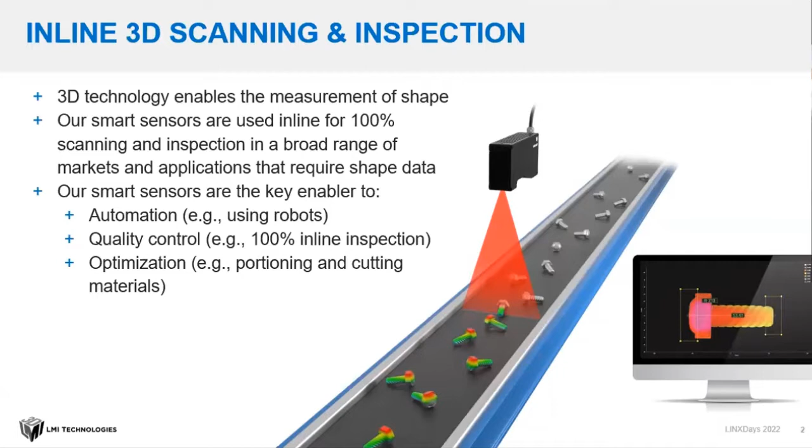LMI makes inline 3D scanning and inspection sensors. They're used in automation, quality control, and optimization applications. We have been in business for quite a long time, since roughly 40 years back; we started at the end of the 1970s. We've sold quite a large number of sensors worldwide for different applications since then. And we're still employing people. We were about 416 people.

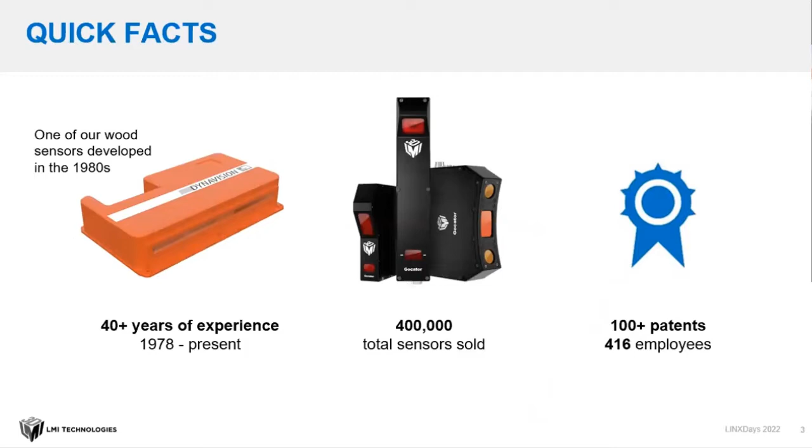So what do we do differently? Well, what we do is chip level engineering. That means that we design our sensors from the chip up. We don't buy cameras and put them into our sensors. We build cameras. We don't buy lasers or laser drivers, laser pens. We build laser pens, build them from the diode up. Everything we do is smart technology.

Smart can mean that a sensor by itself can actually solve an application and give you a yes or no, good or bad decision, or just output some measurements. It can also mean that it's a smart way to connect a couple of sensors together, making it easy for you to get a wider field of view or scan something in 360 degrees. Everything has to be simple, user experience driven. So there is a web server in all our sensors, and you can connect to it just by using your browser, and you will have your sensor at your fingertips.

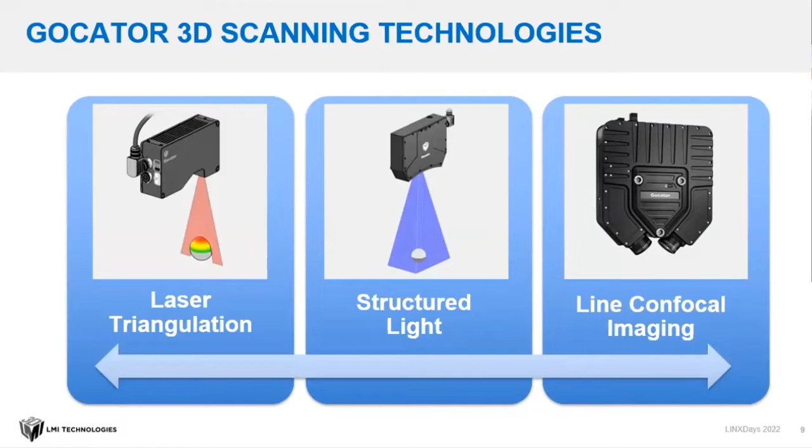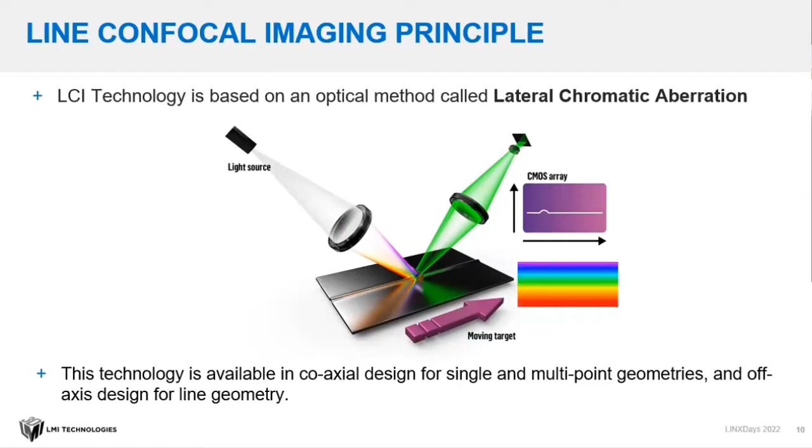This means that we have a white light source that illuminates the target. It creates a spectrum of light wavelengths, and each wavelength will be focused back on a position on a CMOS array. And this means that we use the light spectrum here to resolve a measurement range. So it works roughly like this, where you have the different distances being focused on the detector here. So when you have a nice clear surface, you have a strong peak. If the surface is opaque, it will be a lower peak.

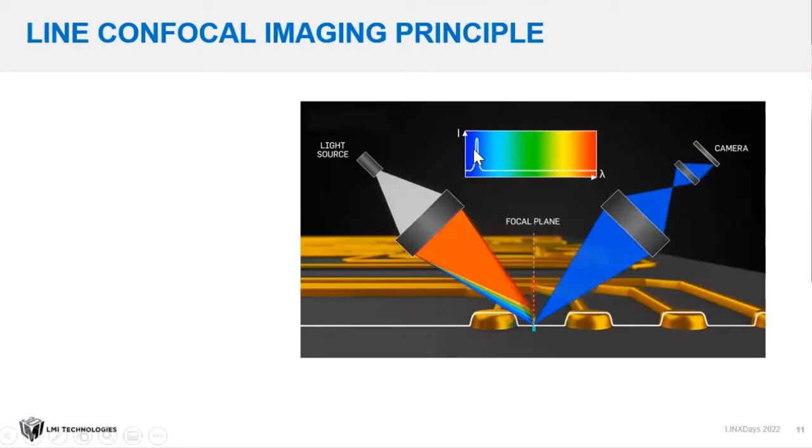So our sensor families consist of the Gocator 1300s, single point sensors. They come in a large variety of sensors from 20 millimeter range up to 2 meter range. Our workhorse is the Gocator 2100 and 2300. That's VGA resolution and megapixel resolution sensors. The higher resolution, 2000 pixel sensor along the laser line is the 2400. When you need to go even faster, but still with a high resolution, you go to the 2500 series. This is about 10 times faster than the 2400, but also with a 2000 pixel resolution along the laser line.

Now we're coming to the interesting parts, because it says 4K here. So this is the 2600, but with a 4K imager, and not really the high speed of the 2500, but it's faster than the 2400. All these are laser triangulation based sensors. We do have a Gocator 200 as well. That also is based on laser triangulation, but that's a specialized sensor for wood scanning.

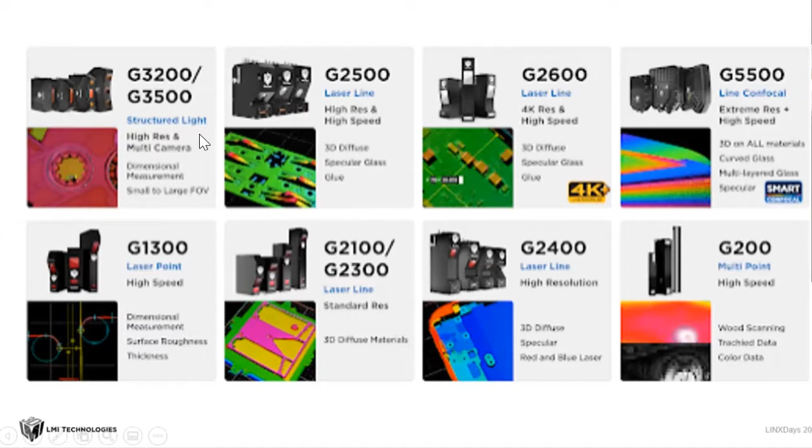And then we get into the Gocator 5500, the new addition here with the line confocal technology. So the advantages of our smart sensor technology is that we can actually scan, measure, and control in just one unit. This means that you don't need any external controllers. You set it up very easily using a laptop and you fire away. Factory calibrated, no external lighting required.

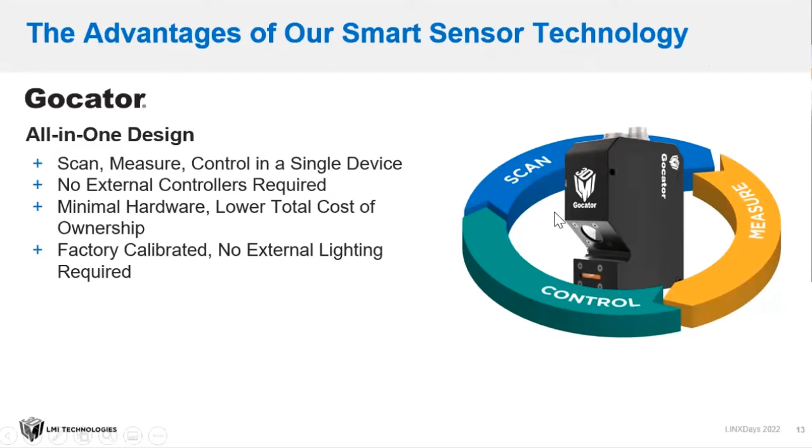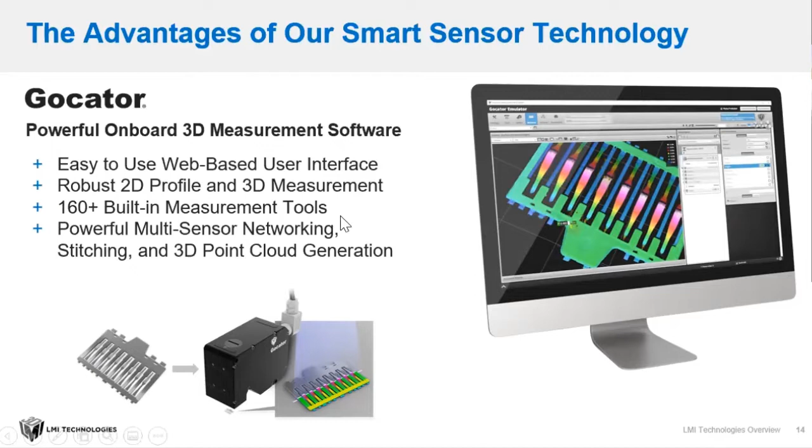We have a big suite of tools on board, so we can perform interesting measurements and calculate different intricate distances. And there are filters on board, so you can actually improve the quality of the data that you're looking at, or actually highlight the kind of data that you're looking at.

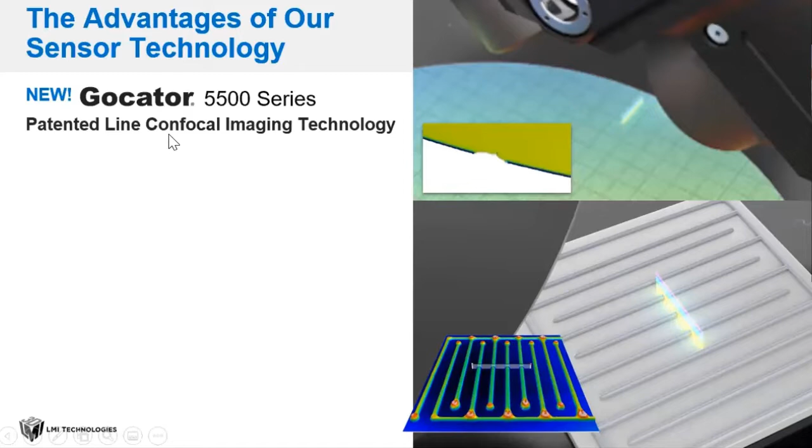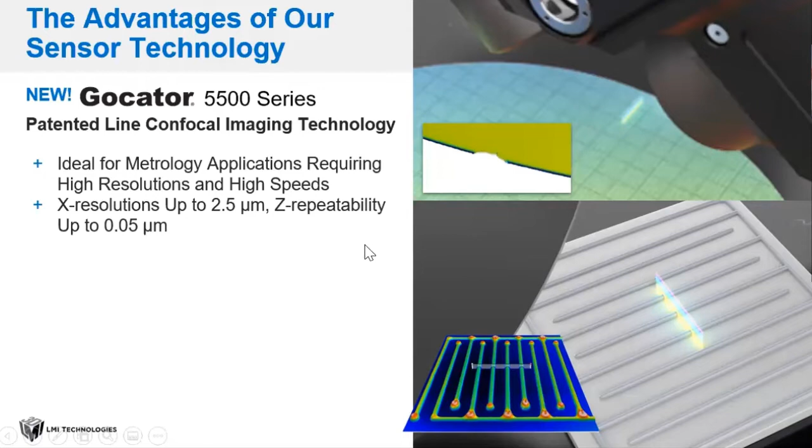The Gocator 5500 series, our patented line confocal imaging technology. This is ideal for metrology type of applications that require high resolution and high speeds. We're talking about X resolution, that's resolution along the line here, of 2.5 microns, and Z repeatability in the measurement range down to 50 nanometers. That's really good. So best in class performance on challenging material structures, multi-layered, curved, transparent, and shiny materials.

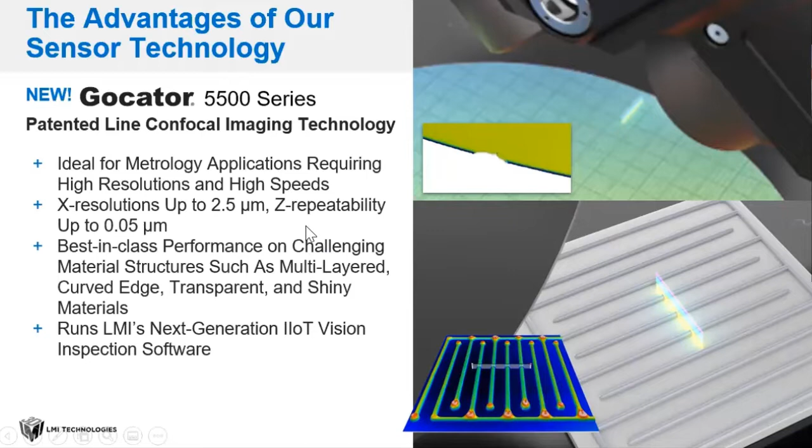And it runs our next generation vision inspection software called GoPxL. So what's unique about this here? It simultaneously generates topographic data and 2D intensity data. That's what our normal Gocators do as well. But in this case, you also get 3D tomography. That is multi-layered 3D geometry.

You capture about 1,720 data points per profile. We can scan at speeds up to 16 kilohertz. That is where you have PC acceleration available to capture objects in motion for inline inspection. Easy to mount, low sensitivity to surface orientation, and so on.

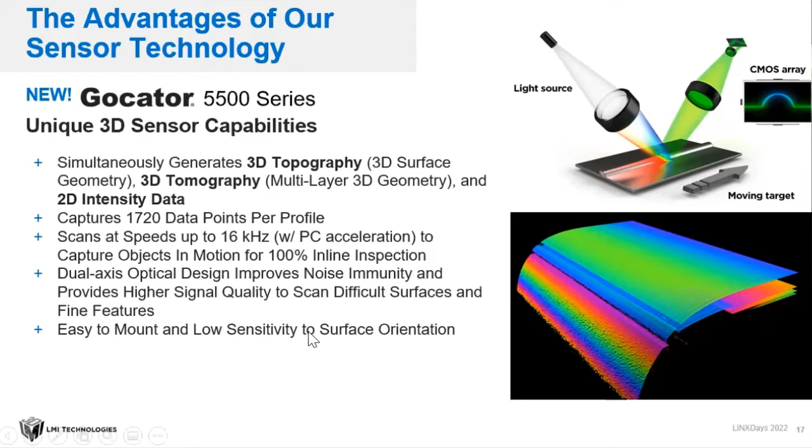It identifies defects such as delamination, scratches or dust on the surface or inside a laminated glass, for instance. It handles any surface type, mirror-like, glossy, opaque, translucent, curved, soft, fragile, or porous. And it scans materials with any color combination.

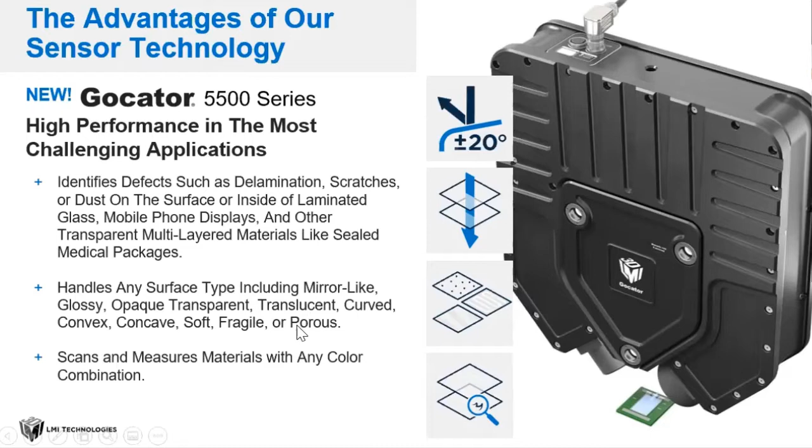So you can get 3D, 2D, and tomographic data from up to 8 stacked surfaces in one scan. That means that we can do thickness measurement through clear layers, coatings, and air gaps. We acquire a profile line of data points simultaneously at speeds similar to 2000 confocal point sensors. And that's pretty good. And then we have multi-sensor networking capability under development that will come a little bit later.

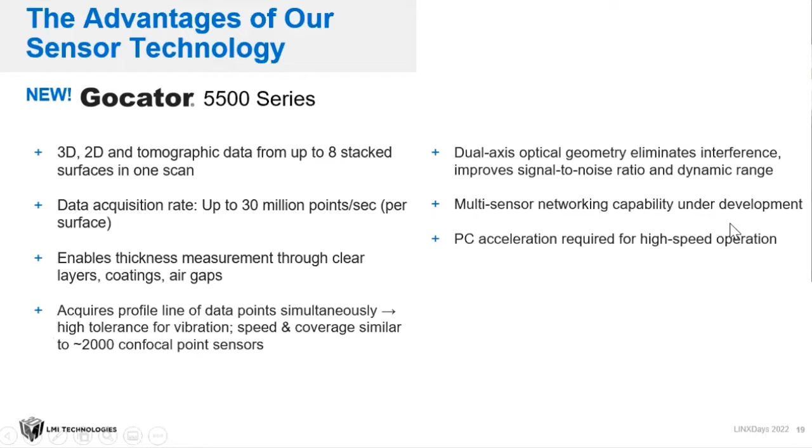And to get the high speed that can be interesting, you need PC acceleration. So the sensors are typically bigger than what you're used to with the normal Gocators. If we take a Gocator 2380, for instance, that's one of the biggest of the Gocators, or the 2490, you have a sensor that weighs about 1.5 kilos. The smallest one here, the 5504, weighs 4 kilos. The 5512 and 16, they are around 20 kilos.

Measurement range, 1.1 millimeter, 3 millimeter, 5.5 millimeter here. So it's all about small parts inspection. Field of view is also quite small, but it also means that you get really high resolution and repeatability.

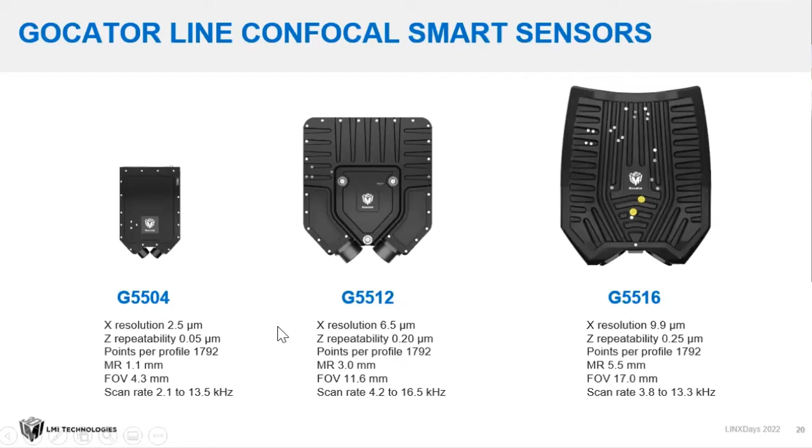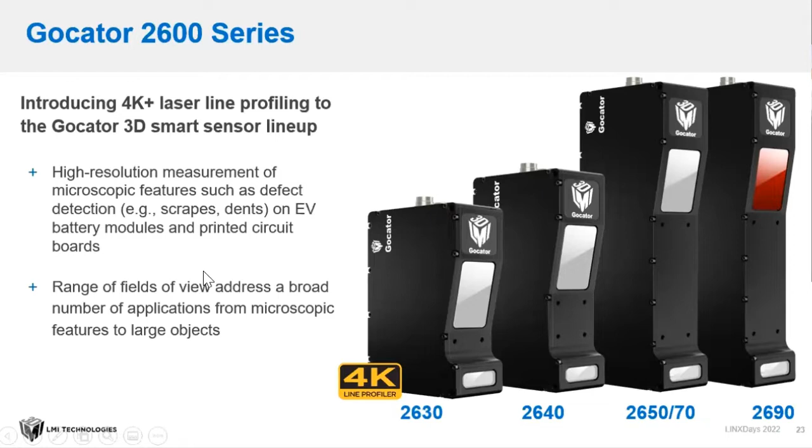Next in line, we do have the Gocator 2600 series, the 4K line profiler. So here we're introducing a complete family of sensors from the 2630, 40, 50, 70, and 90. This is something that is going to be launched within the next days from now. They are ramping up and getting ready for production here, so that you can start looking at some really interesting scanning solutions. High resolution measurement of microscopic features, defect detection on EV battery modules, printed circuit boards are typical examples of where this sensor will be used.

A 9 megapixel imager, 4,200 points per profile over the laser line. That gives you, for instance, X resolution down to 70 microns for 47 millimeter of field of view. Or if you have the biggest one with 2 meter field of view, you're down to 0.5 millimeter resolution. Full field of view, you can scan at 300 hertz. And as usual in the Gocator families, if you reduce your active area of this imager, you will increase speed.

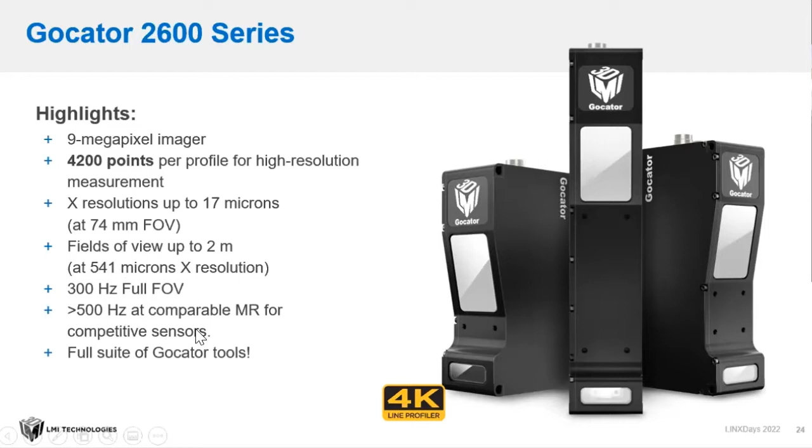So the Gocator 2600 can scan field of views up to 2 meters. And now, replacing, for instance, dual sensors where you need to have two 2400s or even more 2300 sensors to cover a certain field of view at a certain resolution, you can now look at the possibility of maybe scanning with a single sensor over a large field of view. This is really interesting.

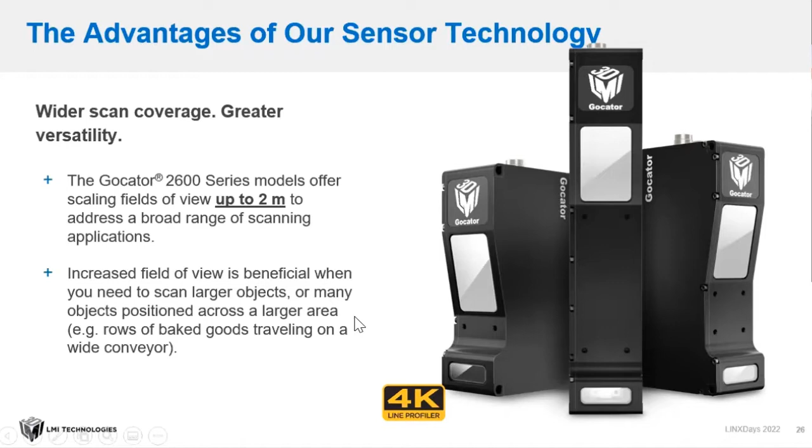And of course, we have our usual native support for multi-sensor networks. It's all there. It outputs a single high-density 3D point cloud ready for measurement if you need that, or just a laser line and a profile. And you can scan 360 of a target in multiple views, or you can mix different 2600 sensor models. That means that if you have a thin, wide material like a particle board or something, you can have different resolutions on the edges where you may want to see greater details.

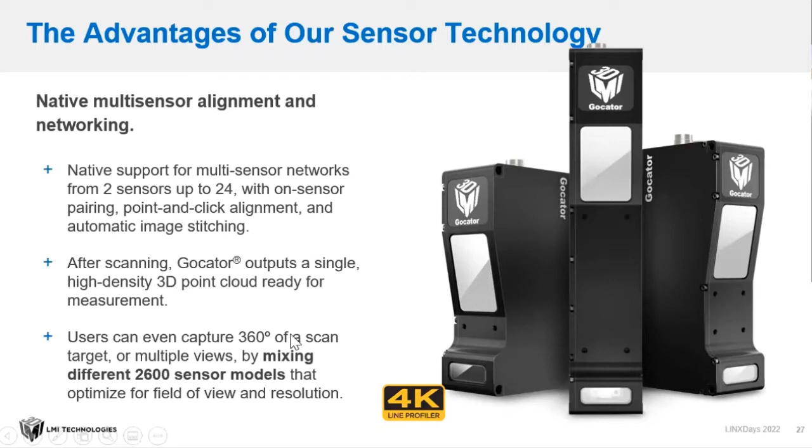They're built on LMI's leading smart sensor design architecture, so you will recognize yourself when you start up these sensors. And of course, it's our standard, easy-to-use, web-based interface. You have the I/O connectivity, everything is there.

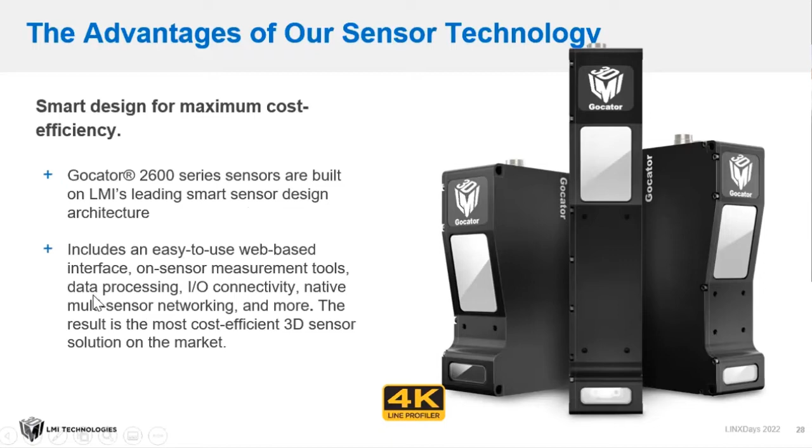Just a quick comparison here. I know that Zach will tell you a little bit more about this. Here to the right, you see a scan using a Gocator 2450. And to the left, you see a Gocator 2650 here. And as you can see, there's greater detail on the 2650 here.

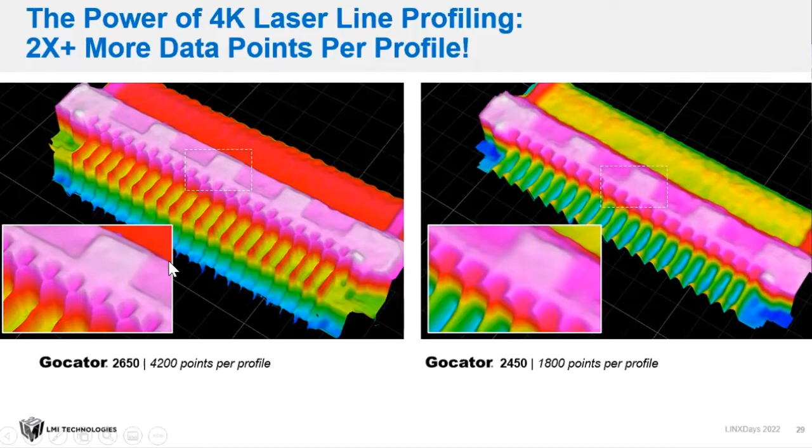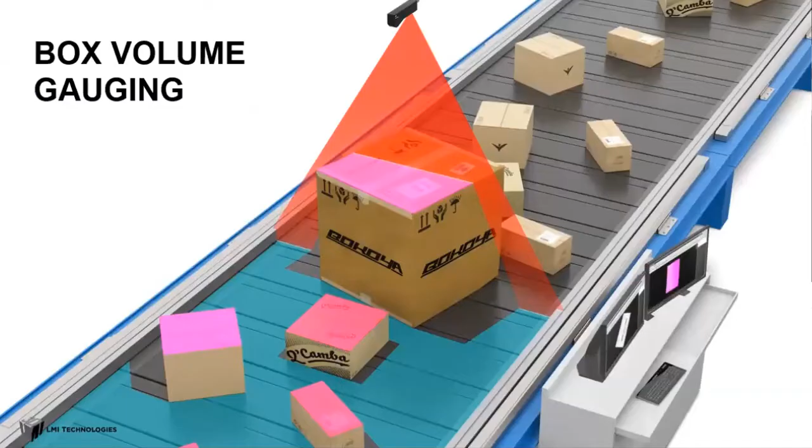Looking into some applications, just a quick overview here. Of course, inline parts inspection on a conveyor, looking for good and bad. The sensors themselves can output the result, good or bad, if possible. Box volume gauging. The high resolution means that you can use a large field of view sensor and large measurement range sensor to actually scan both big and small targets with adequate resolution.

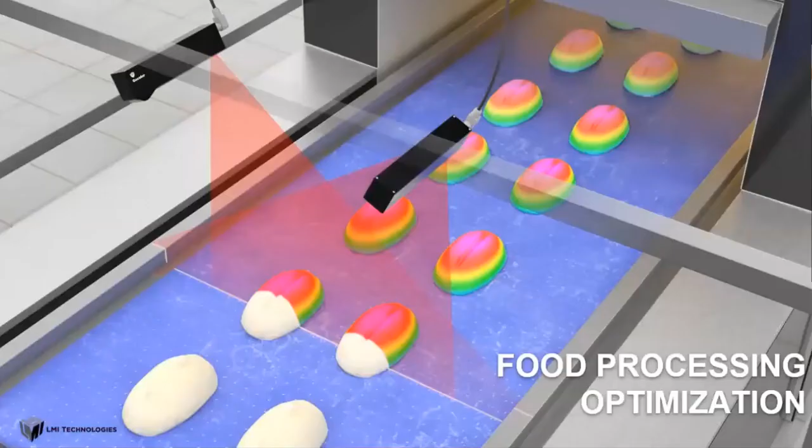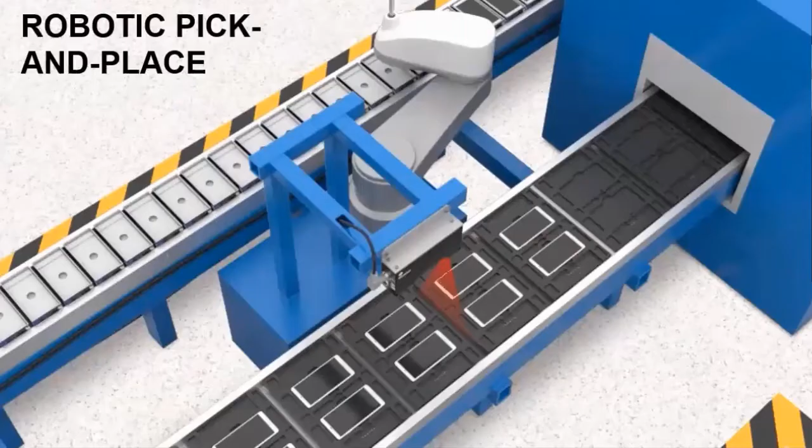Looking at food processing, like in baking products or in poultry or protein management, you may need to see greater detail on both sides and on top before further processing. Robotic pick and place, where you might have had to use two sensors to actually identify all the products on the conveyor. You can now use one sensor to scan multiple lanes on a conveyor belt like this.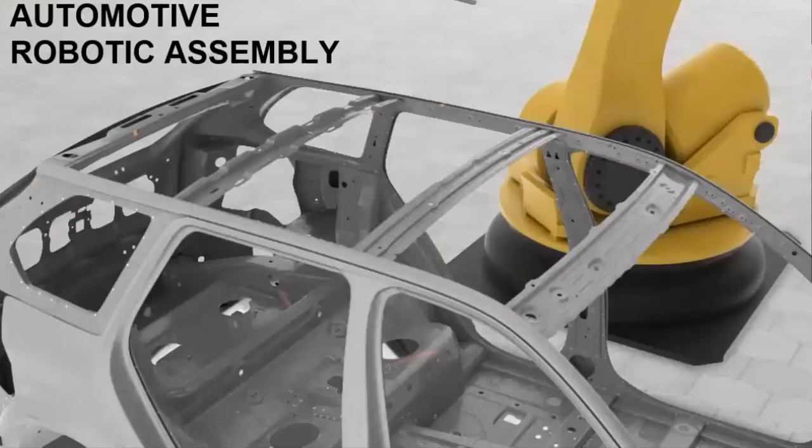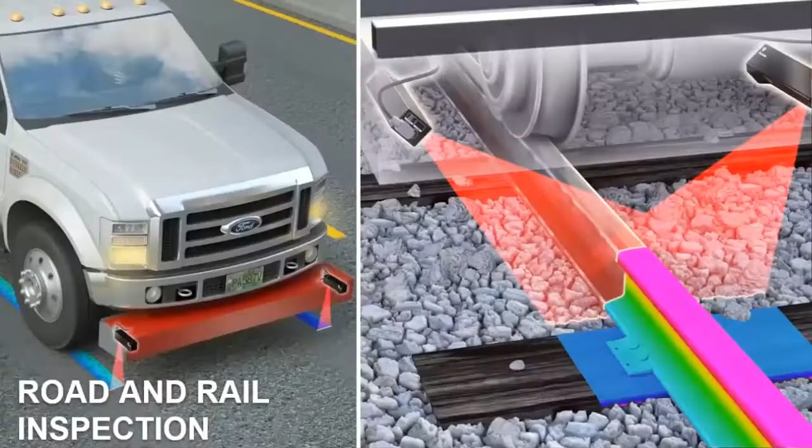Road and rail inspection is also a difficult area to scan in, where you have difficult light conditions and high speed needs. On a rail, for instance, you have a shiny surface on the top where the wheel is grinding off all the rust, and on the sides here you can have quite rusty target coloring.

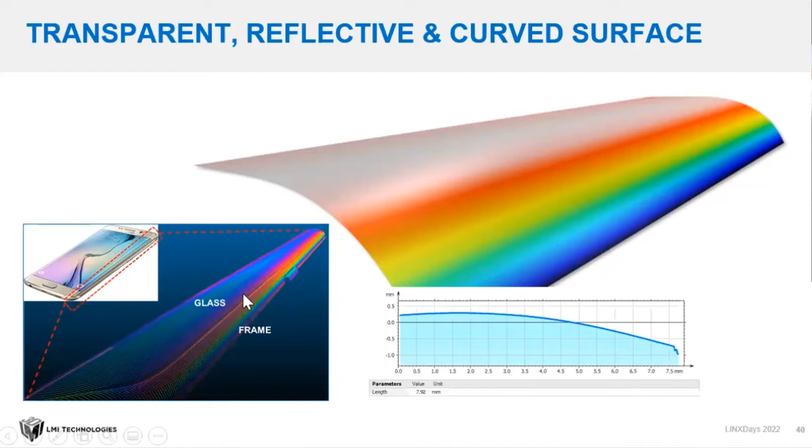Looking at some line confocal applications here to sum up: multi-layered tomography, typically phone display assembly, where you see multiple layers in one single scan. A difficult application is looking at the side where the glass meets the frame. You have to scan both a metallic, non-transparent part and a transparent glass part. And you get really nice data out of this.

Looking at ball grid assemblies or arrays, we deliver metrology grade resolutions using, for instance, the 5504, where you can actually get very high resolution on the height and on the size of each individual ball here.

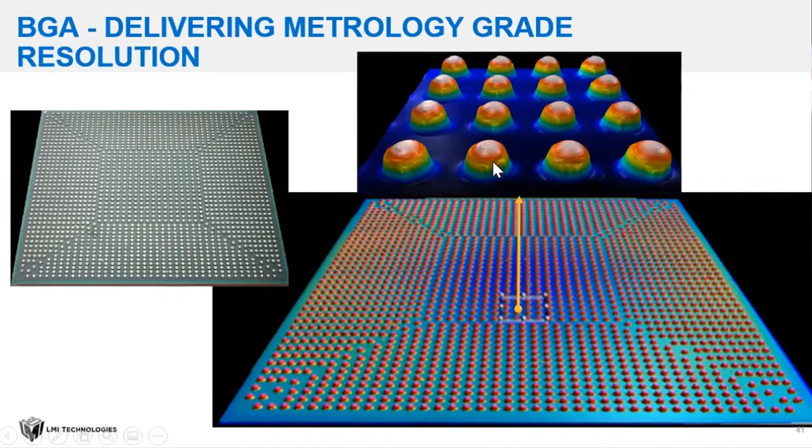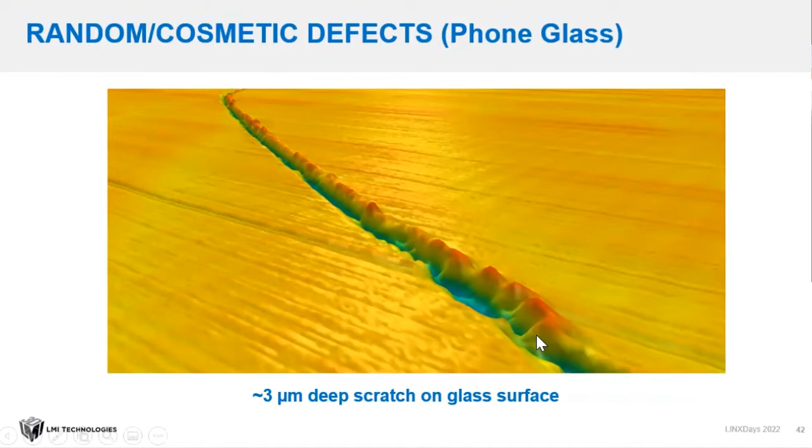And to sum up here, just showing you some scans that we've done on, say, phone glass, where we have a big scratch here. It's 3 micron deep. You will feel it with your fingernail, but hardly see it. And we have scanned office paper, where we printed an O on it, and the O looks like this. And you see you have quite a high resolution on the imaging of the height of this O here.

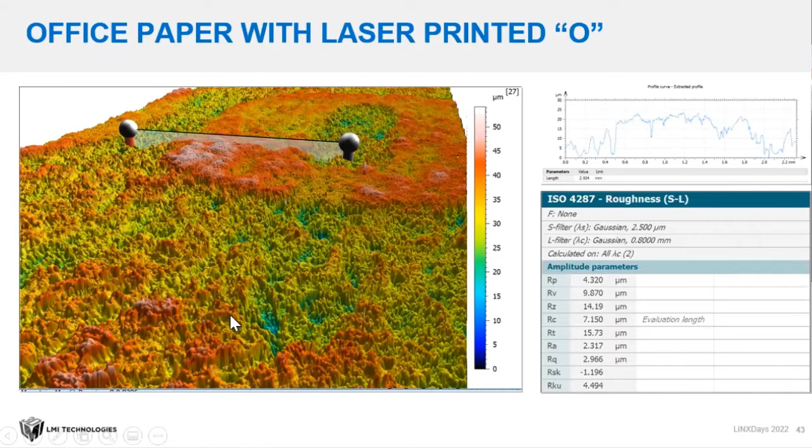So that's a little bit about the overview from this here. So over to you, Zach. Okay, thank you, Peter. So let me share my screen.

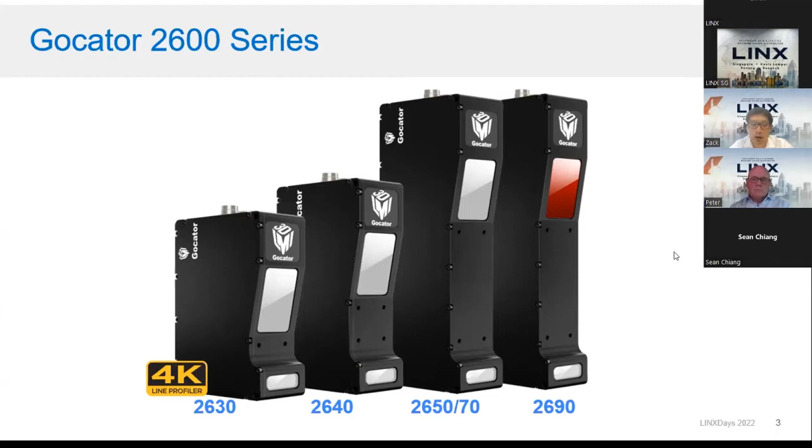So here is the Gocator 2600, the new lineup of the latest laser displacement measuring technology. And as Peter previously mentioned, these are the 4K line profilers. These all-in-one 3D sensors feature ultra-high resolution and ultra-high accuracy, and this time all models are blue sensors, except for the largest one, the 2690, which is red. You may have noticed that the newly released sensors all have relatively wide fields of view. Well, yes, but the good news is that the new Gocator 2610 will also come out very, very soon. So we will keep you posted. Please stay tuned.

So here's the 3D scan comparison between Gocator 2400 and the Gocator 2600. So the right one is 2450. The surface quality is very good. However, the 2450's X resolution doesn't allow the topography of the sample to be examined in the necessary detail. So we can see here that the edges around the corners, they are kind of washed away already.

And the other side, the Gocator 2650, with a 9 megapixel imager, it offers ultra high resolution. Improved X resolution means more details. So now with the Gocator 2600, we are taking the 3D scanning to the next level.

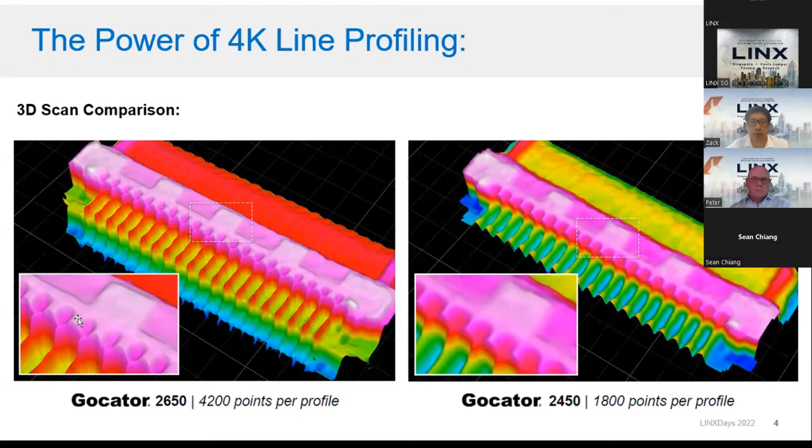Here's an application in the EV battery. And in the EV battery industry, traditional 2D machine vision is not always suitable for the quality inspection, since 2D is not able to provide height information. In addition, 2D vision is not ideal for inspecting low contrast objects like these ones. And the 3D solutions have better performance, and it represents the future.

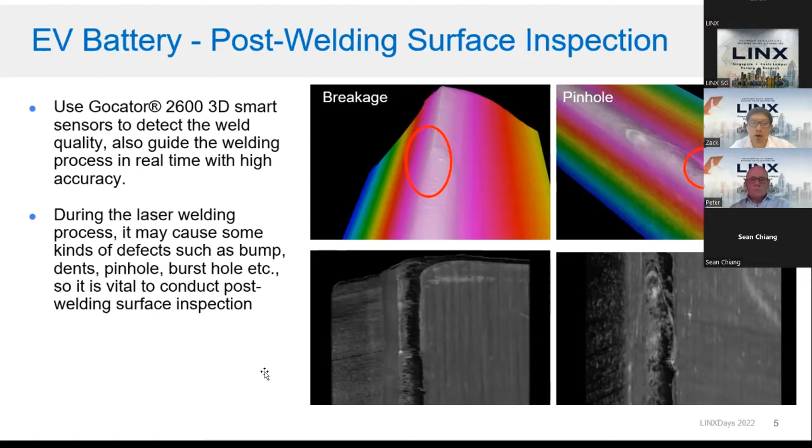So Gocator laser profilers are widely used during the various stages of EV battery manufacturing to achieve optimal product quality and the maximum capacity. So for example, the post-welding surface inspection: the laser welding process may cause many kinds of defects, such as these small bursts, bumps, and pinholes. And so it is vital to conduct a post-welding surface inspection to ensure the battery's optimal quality and its safety performance.

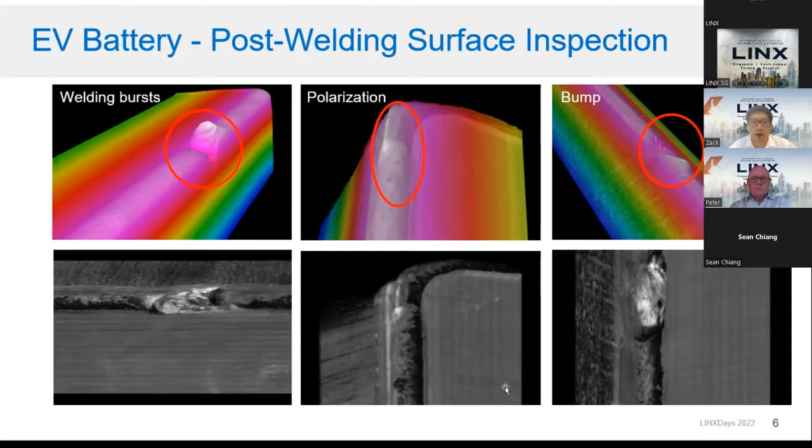And usually the key to success of defect detection lies in getting high quality 3D images. So Gocator 2600 is able to generate ultra high resolution surface data for the successful measurement of microscopic features, such as the bumps and bursts on the battery.

And in the EV battery industry, cell surface inspection is also a challenge. The inspection involves the use of 3D smart sensors to accurately detect the surface features and flaws. And usually our end users always have a strong preference for high X resolution sensors. And the Gocator 2640, the new 4K resolution sensor, is a perfect fit for the surface inspection because more details means closer examination.

In addition, the Gocator 2600 has an improved optical performance on shiny metal surfaces because the new imager is very sensitive. So if the exposure is set optimally, we won't get much noise around the edges. Besides, in some scenarios, with enough X resolution, we can use the 3D sensors to replace the traditional 2D cameras for the width measurement.

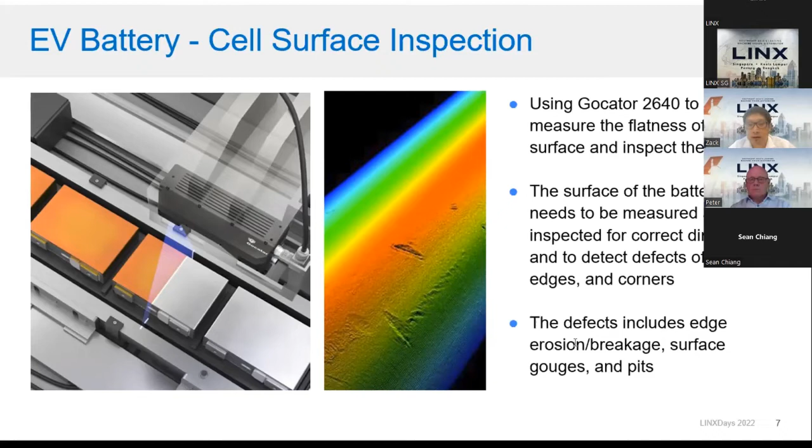And for applications which require multiple sensors, LMI offers a multi-sensor approach with easy setup and easy synchronization. For example, this application, the EV battery module inspection, usually we need two Gocator 2430s used in a wide layout, two sensors here to cover the large field of view.

Now, the Gocator 2600 has a much larger field of view and measurement range. For example, this is a Gocator 2630. It has almost twice the field of view of the 2430. So now with the higher X resolution, the 2630 can be used to replace two 2430s. So basically it's more data, but less money.

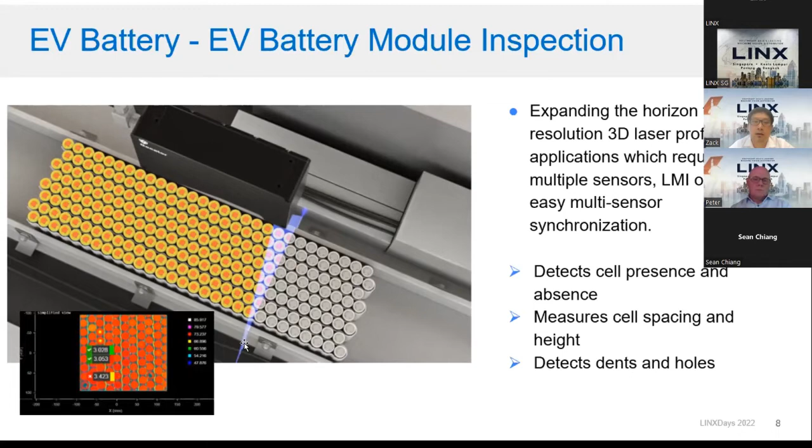And usually the dimension applications are very easy within our Gocator sensor software capability. So you can see, we can count the radius of the batteries. So the dimension measurement should be very easy.

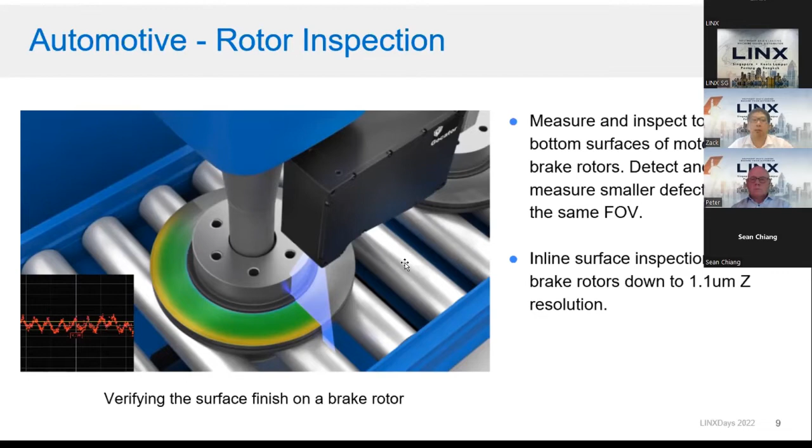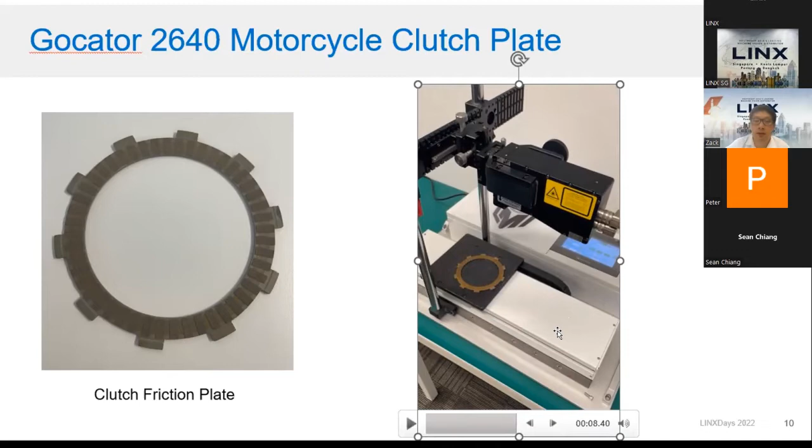And here we have a short video of the Gocator 2640. The sensor is scanning a motorcycle clutch friction plate, a critical component of the automotive transmission system. And as you see, the scanning is very straightforward, and getting high quality surface data is not much of a challenge. So after the 3D surface is captured, the sensor can perform inner diameter measurement. And here, this is the height measurement.

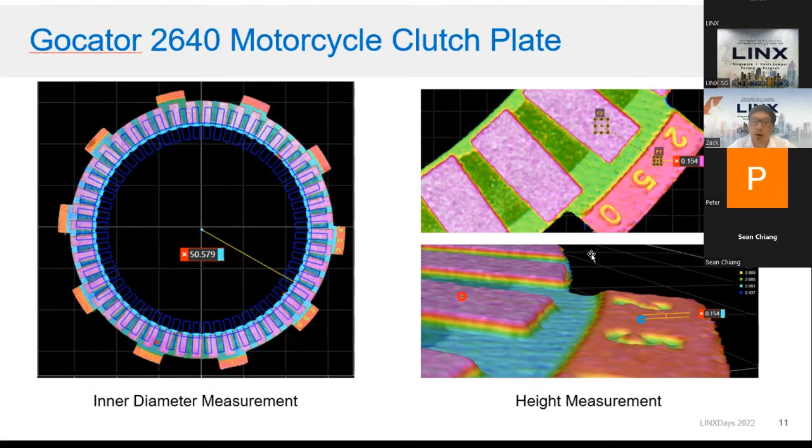Gocator 2600 is more than just a sensor. It delivers not only good scanning performance, but also provides a stunning range of onboard measurement and inspection capabilities. It's still the same application. Here, the sensor can optionally let you count the number of friction pads.

Here we use the surface blob tool. This tool can extract the targets, the friction pads, from the 3D background surface and allow you to count the number of the blobs. And here you can see we can get each blob's area. The surface blob tool also lets you detect surface defects, such as uneven or excess material, or gouges on a relatively uniform background, in either 3D map data or intensity data.

And combined with the new version of the onboard measurement tools, Gocator 2600 brings a high level of measuring performance to the end users. And as always, at LMI Technologies, we will improve the 3D scanning and our software tools to simplify new applications in the automation industry.

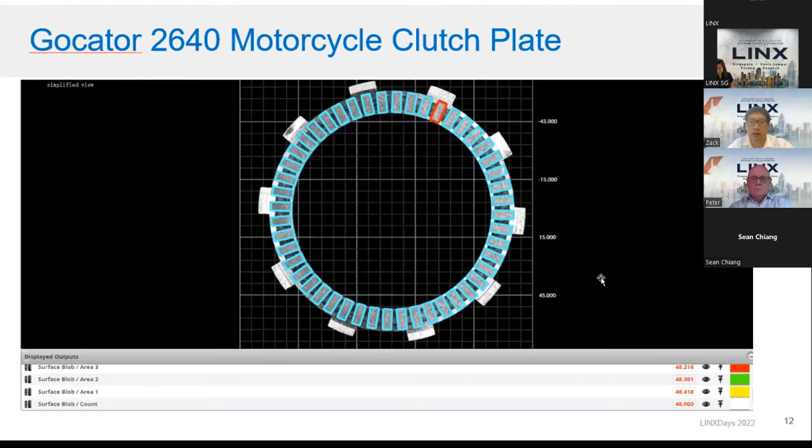And our new line confocal sensors, the new Gocator 5500 series. The Gocator 5500 series introduces line confocal imaging technology to LMI's proven industry-leading smart sensor design platform. So now basically, the Gocator 5500 and the laser profilers share the same easy-to-use web-based interface. And with the same built-in measurement tools and the same I/O connection method, the confocal sensors become more user-friendly.

And the sensor doesn't require the 10 gig network card anymore. And with the new PC acceleration, the Gocator 5512 and the Gocator 5516 can achieve a 20 to 30% speed increase.

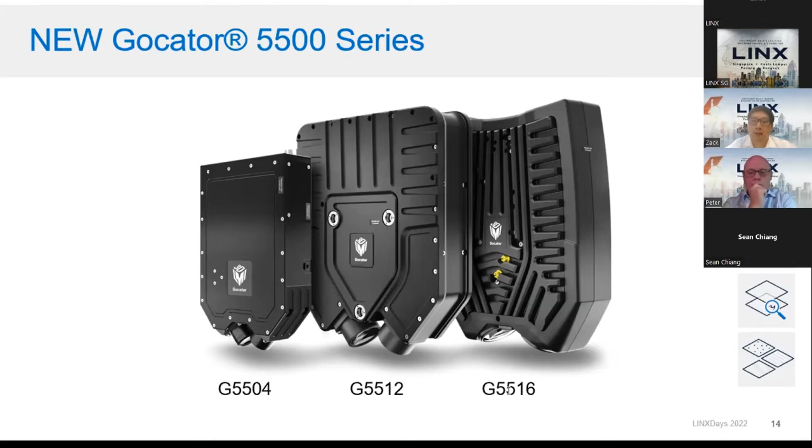And here the sensor is scanning the cell phone edge. Gocator 5500's off-axis arrangement allows the sensor to avoid unwanted reflection from shiny surfaces. And this unique design also permits multi-layer scanning. Other optical inspection systems and optical sensors on the market cannot provide this scanning capability.

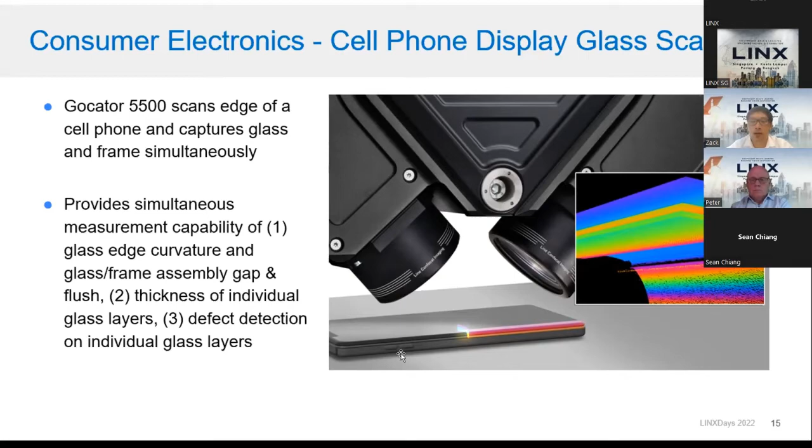Here you see the Gocator 5500 can scan the edge of the cell phone and capture the glass and the frame simultaneously. Although the target is fully transparent and curved, the sensor is still able to capture a very high quality 3D image. And as shown, the sensors are able to return multiple layers of data on translucent material. And they are well suited not only for collecting 3D data, but also intensity images.

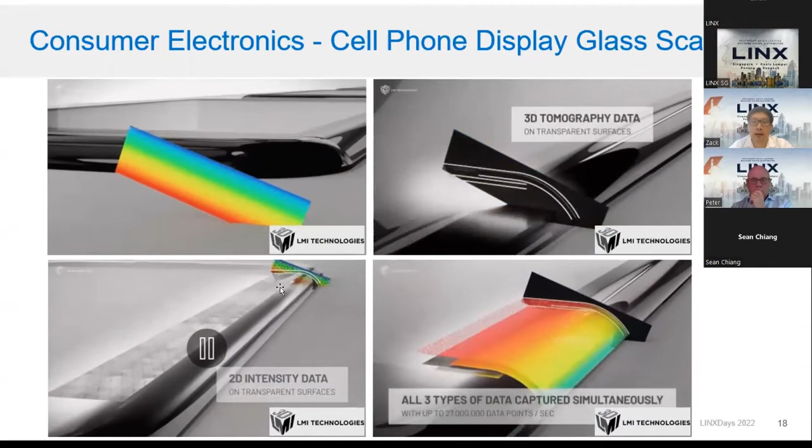For the line confocal sensors, when the target is in its measurement range, the sensor's 2D image is always in focus. And here, the second one shows the tomography image of the smartphone display. For display manufacturers, there are a lot of defects during assembly, and inspecting those defects inside the display was a big challenge. Now with the Gocator 5500, we can solve this issue.

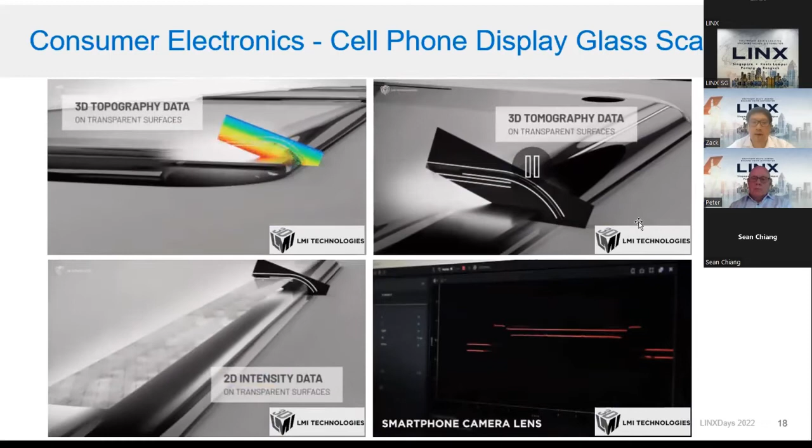See here, here's the measuring of 3D curved glass. This was done with the Gocator 5512. And the Gocator 5500 is widely used in the semiconductor industry for 3D inspection. It is popular at many stages of the fabrication process because line confocal technology provides semiconductor manufacturers with a non-contact, ultra high performance solution for precision 3D inspection.

And here we have an application about BGA. This is a very small chip, and there are thousands of tiny solder balls on this PCB board for connecting the chips and the PCB. In the past, it would take significantly more time to measure these solder balls with a microscope. Now with Gocator 5512 or Gocator 5504, we can complete measurement of all solder balls in just minutes.

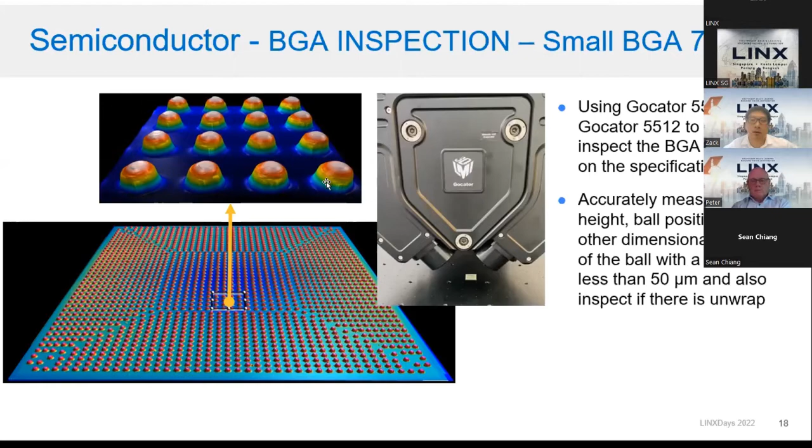And check this picture. Because of the off-axis design, the sensor provides exceptional signal quality for measuring microscopic features such as the height of the BGA balls. And the upgrade to the Gocator platform allows the desired measurement to be done with LMI's built-in tool sets. Now the new line confocal sensor can accurately measure the ball height, the ball position, and other dimension information of the ball.

Here in the medical industry, the Gocator 5500 provides a highly specialized vision solution for the most challenging, complex measurement applications. Here, the sensor is measuring a small tube. Small plastic tubing with a diameter less than 10 millimeters is used in a wide variety of medical applications. Because the tube walls are very thin, the manufacturing tolerance for thickness and concentricity is typically very high.

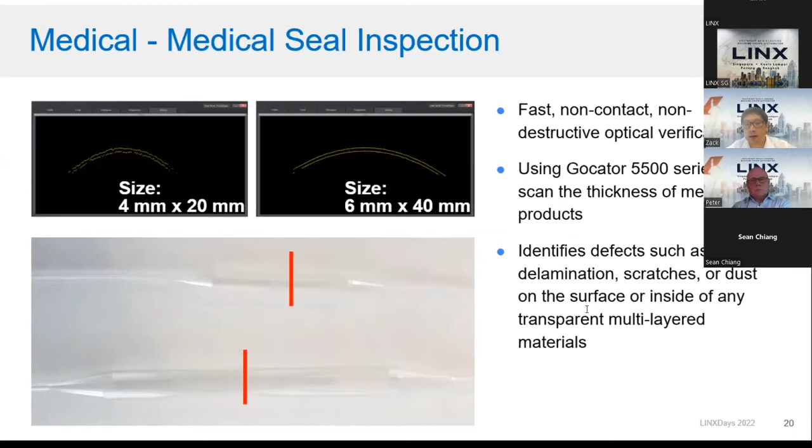And the Gocator 5512 offers a fast and non-destructive alternative to the common process of cutting tube samples for optical measurement of thickness. And in addition to the thickness measurement, defects like delamination, scratches, and particles on the surface or inside can all be identified as well.

And the Gocator 5500 is ideal for quality control of hybrid electronics and coated transparent substrates to detect defects.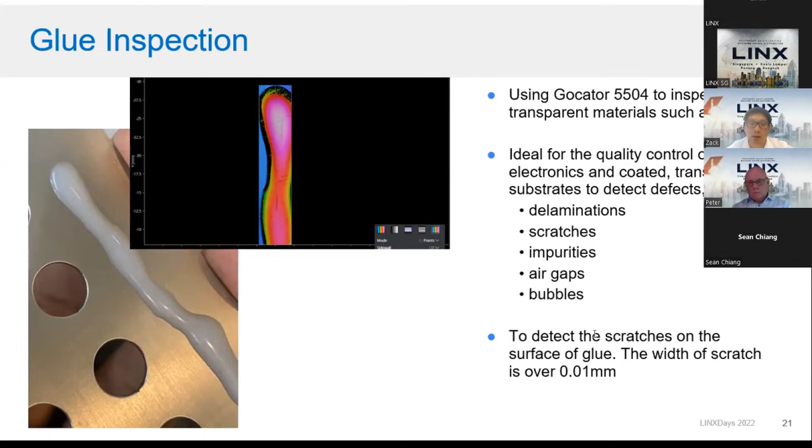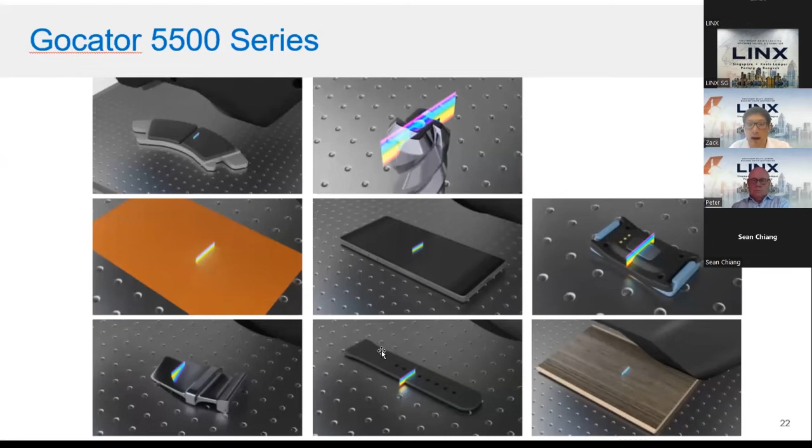And to sum up, line confocal imaging technologies allow Gocator 5500 to scan practically any material type. And now combining the LCI's unique optical approach with our Gocator's proven inspection software, our scanning and inspection solutions lead the industry in solving challenging applications across a variety of markets, such as consumer electronics, battery, pharmaceutical, semiconductor and medical industries.

And given the high accuracy and repeatability of our Gocator 5500 and Gocator 2600 sensors, our customers now have an increased demand for a great stage. So now introducing our new Photon optical inspection system. This system utilizes a marble table for machine stability. The system also has high resolution encoders for the X, Y, Z axes and high performance servo drivers. So with the high accuracy multi-coordinate controls, Photon can offer great measurement accuracy and efficiency.

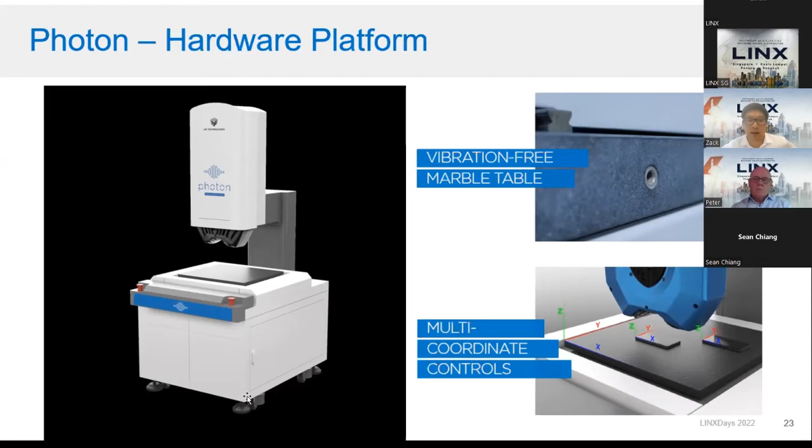Additionally, Photon is also an image analysis and surface metrology software platform. This all-in-one software can handle sensor configuration, stage motion control, point cloud acquisition and data analysis. You can complete all these steps in just a few minutes. It also generates a standardized scanning report for your surface analysis and measurement results. So it really makes every type of inspection easy and flexible.

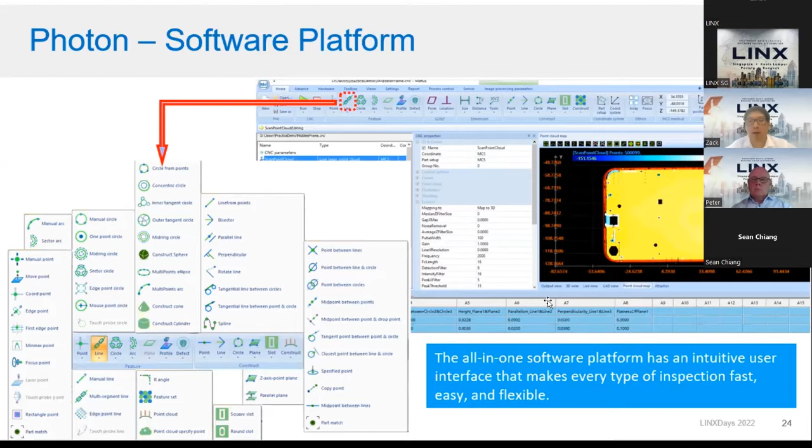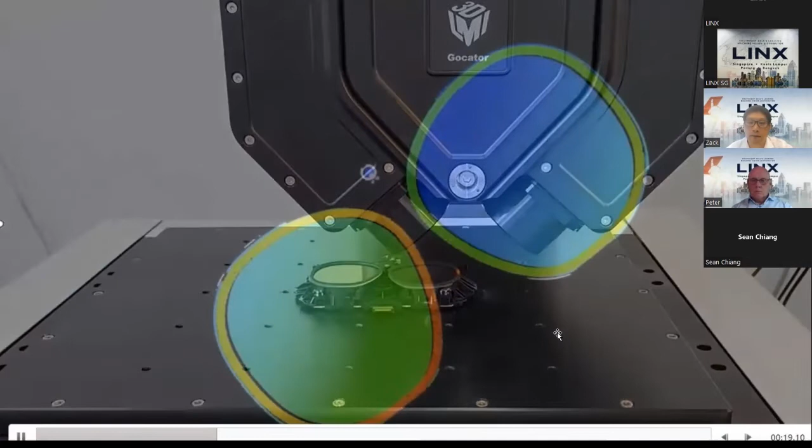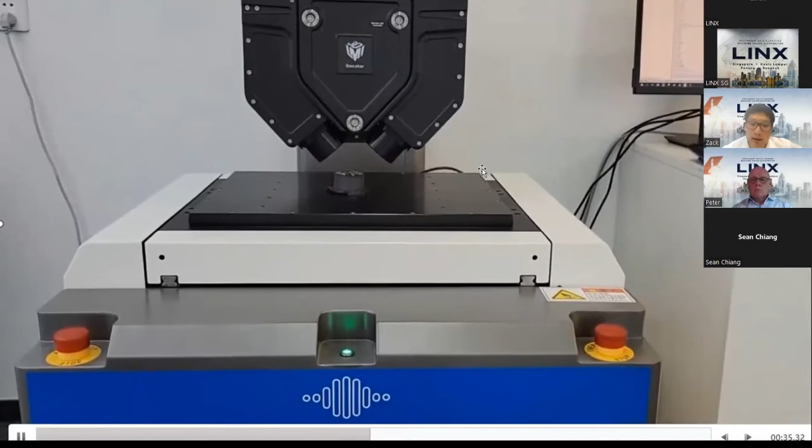And here we have a video clip of Photon and Gocator 5512. The sensor is scanning an AR goggle. Photon has a vacuum table, so you can use suction to hold the workpiece in place during scanning. And you see the Photon system can perform multiple scans and then automatically stitch all this scan data into one single 3D image. This is the lens of the AR goggle. Here it scans the part multiple times, and it provides us an automated method for accurate 3D stitching, which is cool.

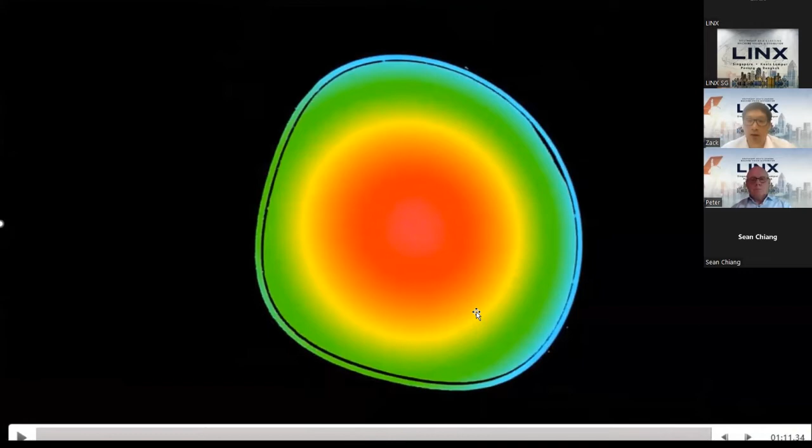Did you guys actually learn anything through the session? So which one can actually scan through the multiple layers of the cell phone or the reflective parts of a car body?